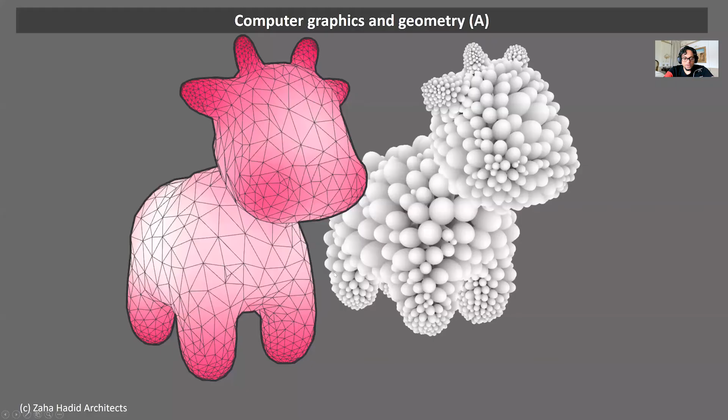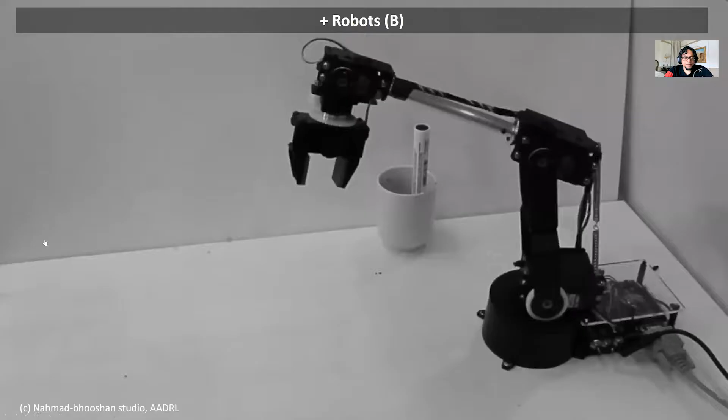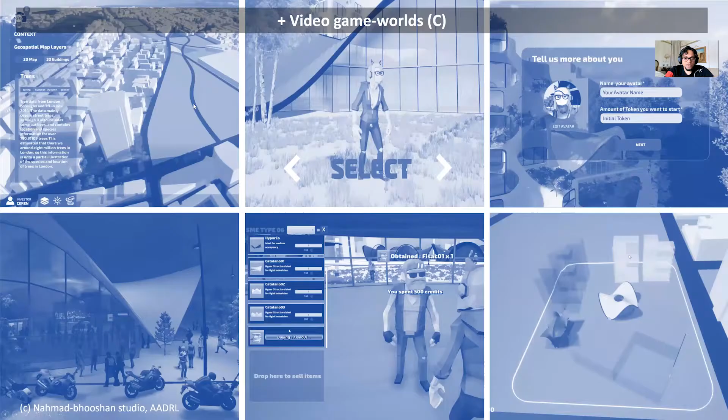The basic idea I want to communicate is that we are combining emerging and rapidly evolving technologies in computer graphics and geometry, along with similar progress being made in robotic fabrication, and also the extraordinary opportunities offered by video game technologies and video game worlds. These three things could be combined as a solution to this.

What do we mean by that? Typically, the built environment, even though it affects all of us, hardly any one of us has a say on when things are built, how they're built, and so on. As a consequence, they end up being unloved and oftentimes leading to demolition, which, as we all know, causes quite a lot of carbon emissions and so on.

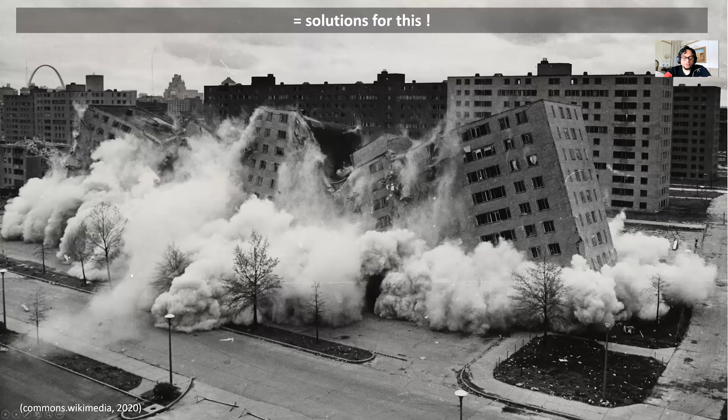The 20th century paradigm or obsession with automation and universality, treating buildings as cars and cities as machines, has led to sprawled cities, very low density development, something amenable to the motor car, and not particularly amenable to humans. On the other hand, it has also made dense, human-scale, pedestrian-friendly cities fall out of favor.

But reality bears other evidence. In reality, Atlanta consumes an order of magnitude more resources and carbon footprint compared to Barcelona for the same population. This is very easy to understand why, because sprawl obviously consumes a lot more resources to heat and to commute, apart from causing a lot of social isolation and mental health issues.

So perhaps it's time to think about not privileging automation and universality, but considering more about material and energy conservation, and adaptability and flexibility of our cities and of our architecture.

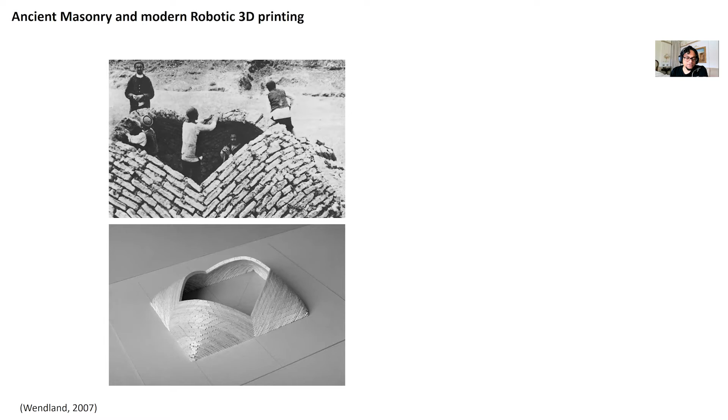One of the things that really interests us is how to capture some of these ancient wisdoms in masonry, particularly not only the global shape, which is particularly suited for very low strength materials like brick and even in many cases adobe, but also how to lay the material in specific directions aligned with the compressive force flow, thereby offering a further paradigm to use low strength and also less material to span space.

This is also very much compatible with the kind of modern 3D printing logic, whether in clay or in cement, because both of these are highly compression-dominant materials, and so a lot of the logic of masonry transfers over to robotic 3D printing as well.

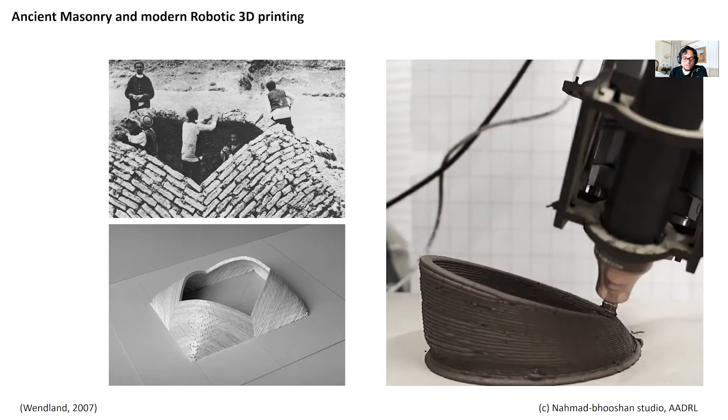Some of these principles were also recently demonstrated at a much larger scale in Venice, where all the blocks follow the masonry logic. There is no reinforcement, it's entirely held in compression. Each block also follows a kind of Nubian vaulting logic, where the filaments of concrete extrusion are aligned perfectly orthogonal to the force flow, the compressive force flow.

Also, you can see that the steel is cleanly separated from the concrete, which allows for easy recycling. So masonry logic is definitely something to consider when we are thinking about 3D printing in concrete and other compression-dominant materials.

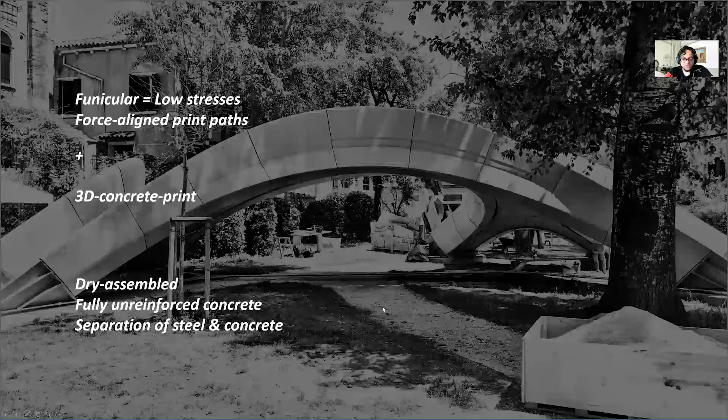I won't belabor these points, but the various features of masonry logic lead to reduction in the overall amount of concrete we use, and 3D printing can allow precise placement of material where it's needed, kind of like an artificial stone which is carved out and mostly hollow. So there's enormous material savings that way. Also, because it's dry assembly, you could disassemble and reuse this, and replace some blocks if they were damaged, so there's a repair regimen that could be implemented.

Also, because of the clean separation of materials, it's very easy to recycle or crush the concrete or recycle the steel separately, which is one of the big problems with reinforced concrete - the steel is deeply embedded within the concrete, and separating them is a bit of an issue.

So that's change one, on how do we design and how to build, trying to incorporate as much of the ancient geometric principles of masonry construction, and also the methods of drawing them.

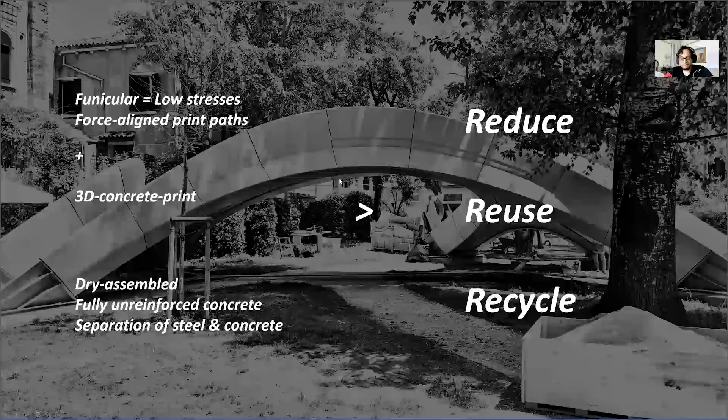What is change two? That is who decides where and how big and how much these buildings should be, and that's where we're increasingly paying a lot of attention to video games.

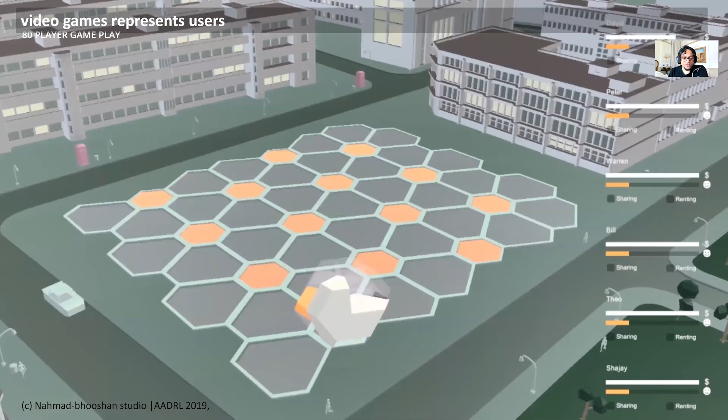Why? Because unlike CAD software and other engineering frameworks, which do not actually represent the end user, games allow us to truly represent in our software systems the end user. So this is a huge change - as soon as you start thinking about the end user, the way you design already changes.

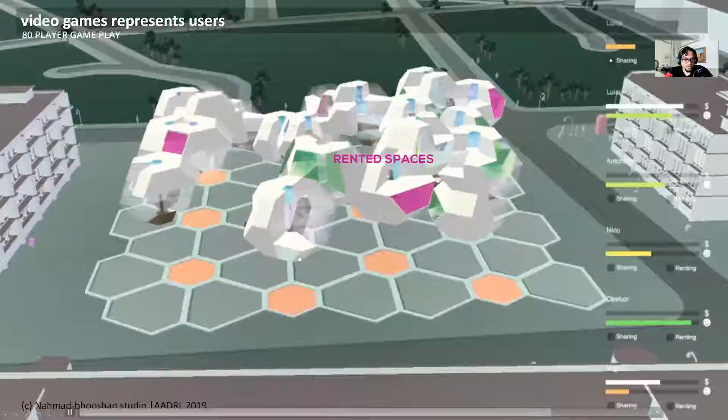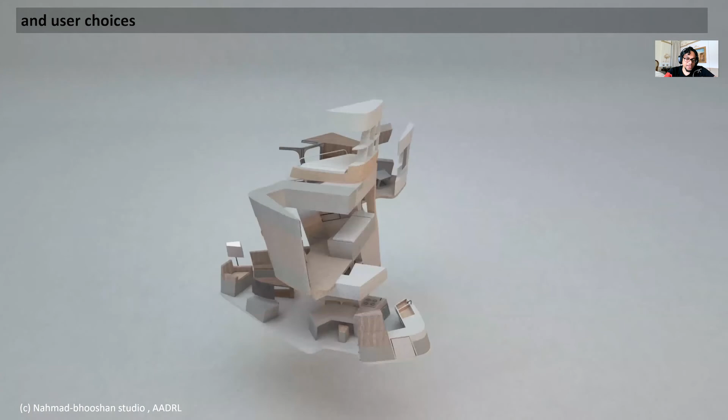In addition, games are built for choice - everything is about actions and a choice menu, which comes default with any game. That's another reason why we're interested in tapping into and incorporating all of our geometric and robotic manufacturing progress into video game engines.

We originally started with Unity, but now we've switched over to Unreal because there's far greater compatibility with our geometry and manufacturing code frameworks. Combining this idea that users are represented and there is lots of choice, there can be a wide variety of alternative outcomes that we need to consider.

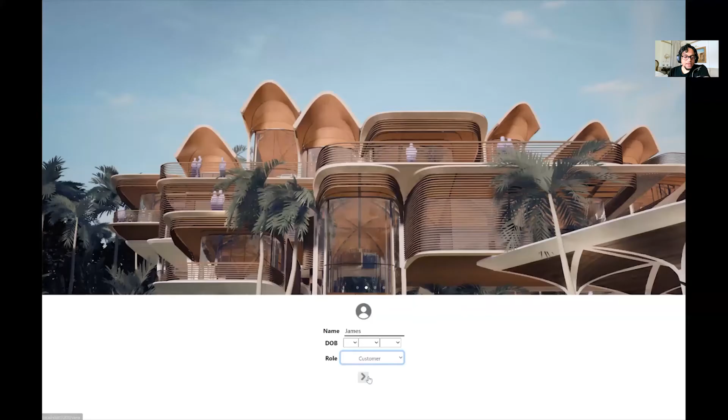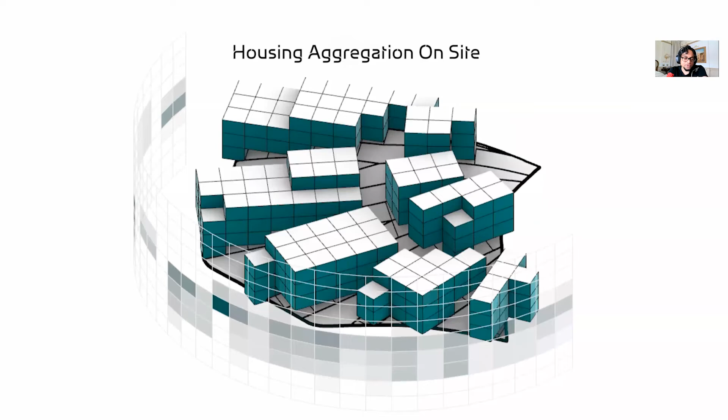We're also prototyping real world applications of this. For example, for a residential development off of an island in Honduras, we developed a web app where users can choose pixels and also rights related to those pixels, like viewing rights and exclusion rights. It becomes an asset that they own, but once you convert it into a user-owned asset, they can also trade it. So that's the general idea of this kind of pixelized version, and it's also video game compatible.

So that's the tech stack: material-conserving and robotically made building parts and building shapes, so-called architectural geometry, which has structural and fabrication awareness. The second big part is end user participation. So together, these really show that one size need not fit all.

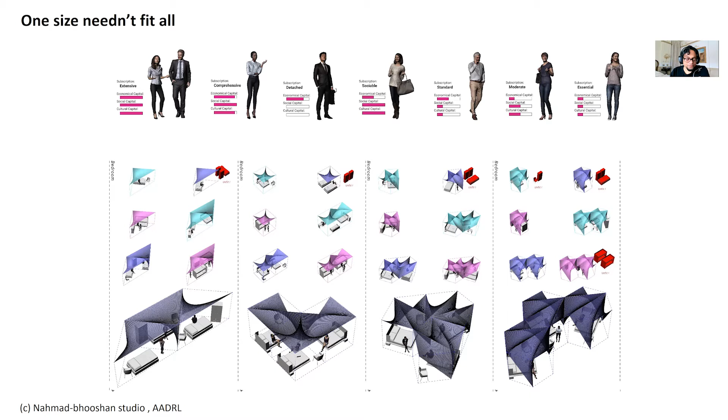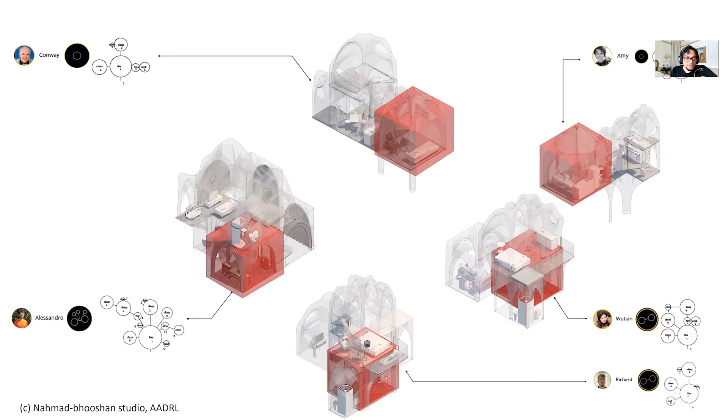You can address the various economic and social and cultural categories or requirements of individual users, and spatial requirements and desires and so on. And what it also means is that if the demographic changes, if the end users change, or the relationships between them change, or the professions and work relations change, or how they use space changes, the parameters could be recomputed, and it could also lead to a completely different language even. So there's not a prescription of a particular style.

There's only a prescription of using these kind of technology and representing users and user choice, and also particularly digital fabrication methods to realize these spatial communities.

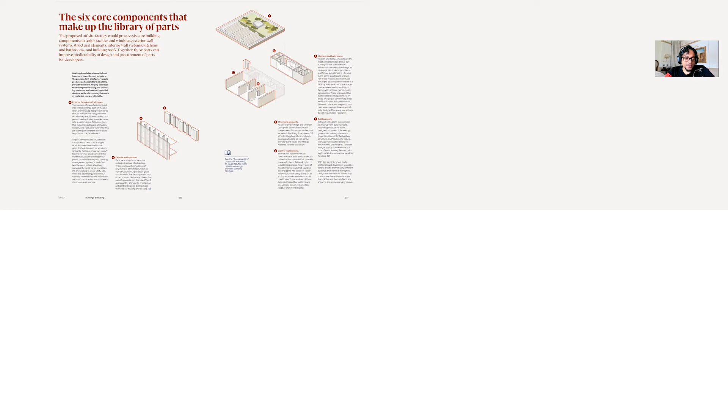So one version of this, obviously lots of tech companies tried this. It's a centralized model, and famous among them is Google, and they tried a version of this in Toronto, where they came up with a kit of parts and also a set of designs that can be composed out of the kit of parts, and also a timber related supply chain.

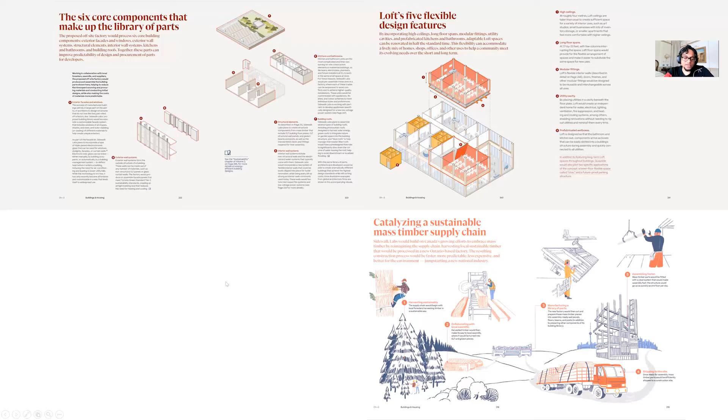To make those parts in a large gigafactory. So there's the A part, which is some form of material conserving shapes or designs, and then there's the digital manufacturing bit. There's a lot of innovation here that Google and Sidewalk Labs did achieve and made progress on several fronts, but there were some issues which are particularly pertinent to the current discussion.

What are those? If we just switch to a different economy or profession, consider centralized games, where a game like Fortnite has millions and millions of people playing every month, and they spend inordinate amounts of time and expenses. They make in-game purchases of assets, so they do spend quite a lot.

It's a big economy, but it is a closed, one-sided economy. Users just buy stuff, and the developers develop features that they think they will sell. The issue with this is you can easily replace, for example, the Fortnite developer with a famous well-known architectural software developer, and you can replace game users with architects, and we know what the issues with that are.

In comparison, we can think of another game like Axie Infinity, where a small change makes a huge difference. What is that small change? It's that the users own the assets. And as soon as the users own the assets through a trustless system like a blockchain, there's individual ownership.

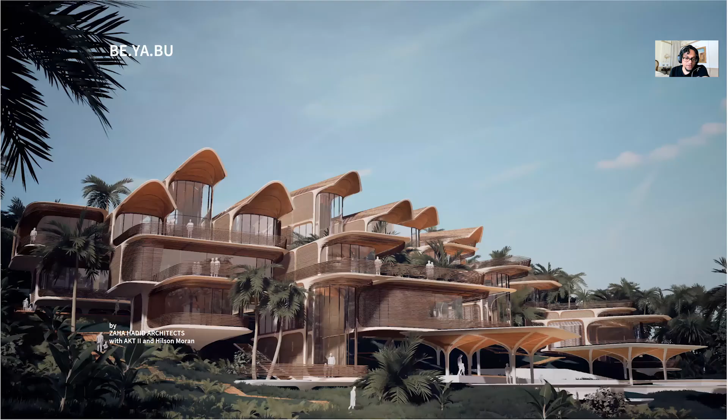We are trying this in Honduras with a little real world test. We started with the idea of two hypothetical companies, one on the early configuration and user participation side, which uses an Unreal game engine, and then the other side to physically realize whatever choices the people make. So this is one potential future that we imagine by playing the game ourselves.

And this is how it works. It actually tends to be a lot more work for the design team, because we have to think of various possibilities between which voxels will be picked and what will be the state of the voxel, etc.

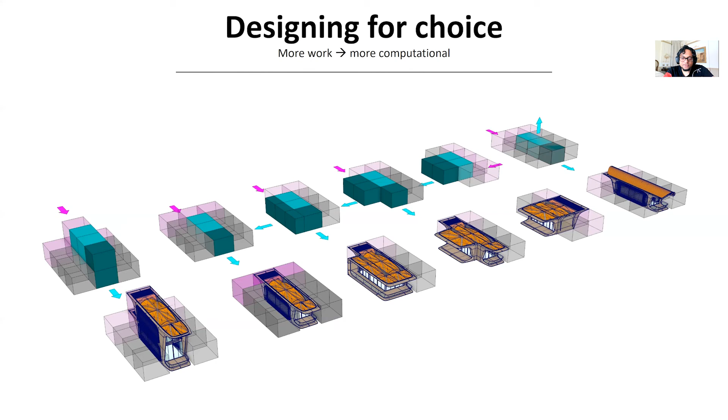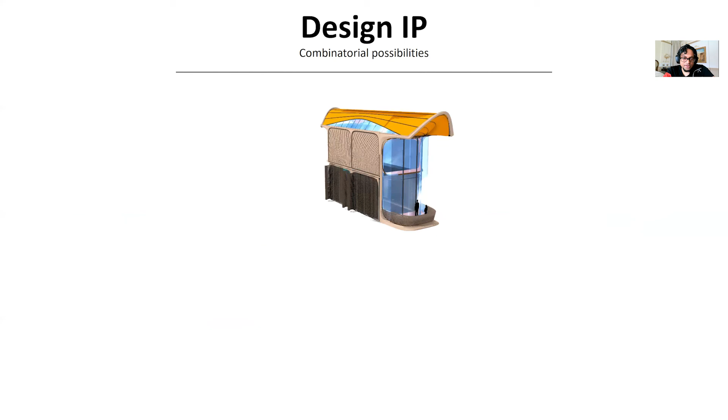We also need to think of a coherent part-to-whole kind of relationship, and keep it varied enough that it doesn't end up looking like one size fits all anyway. So that ends up being a lot more, and a lot different, design work than what we might normally be used to.

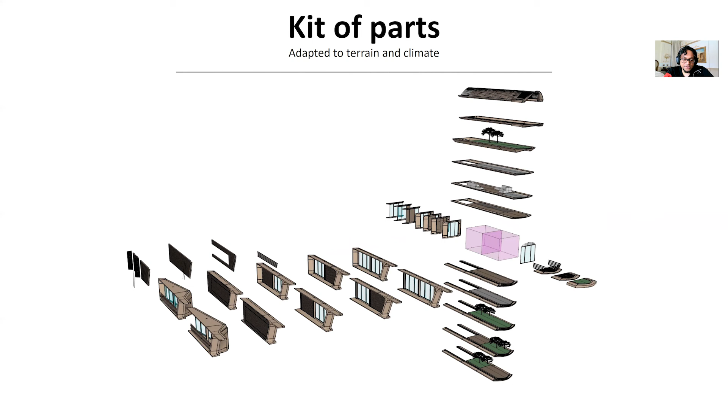There's also more work to be done detailing all the kit, each of the parts and so on. Here's the ideas related to the microfactory: it's low investment, you just import the robots and use local labor, some of whom are highly skilled in carpentry, so you're augmenting the local economy.

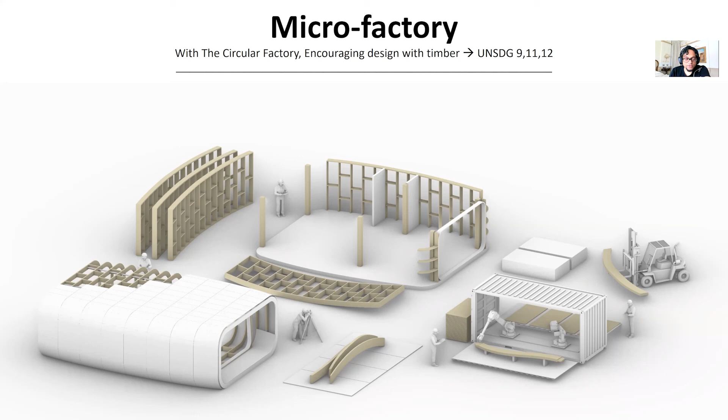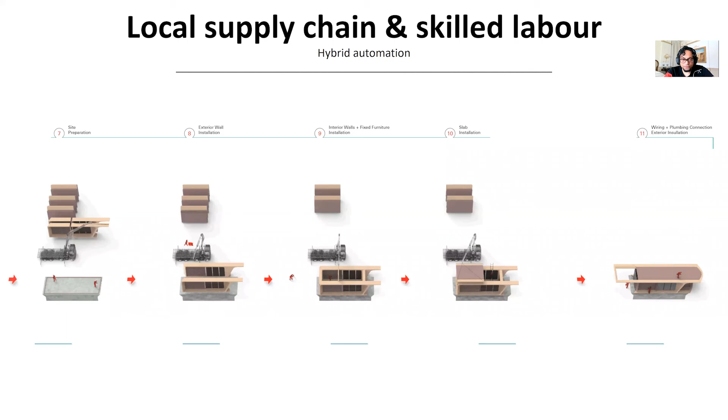Rather than bring in prefabricated boxes, you try and make them on site or near site. That also gives us an in-depth view of how to convert raw material into the final outcome. So this is where we are at in terms of implementing it.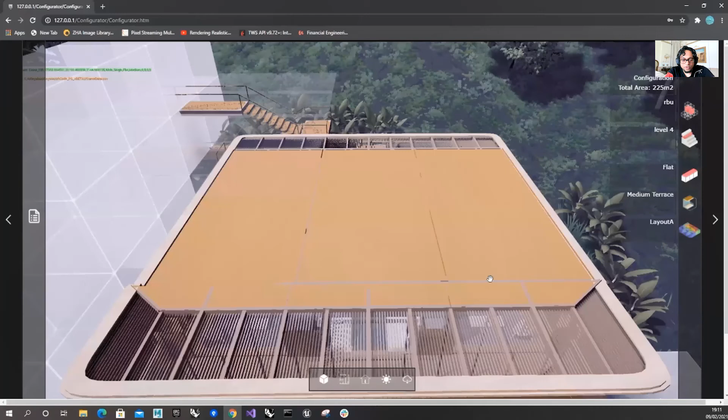Once we put the idea forward, we're building up the framework, and also the intellectual thinking behind how to legally encode all of these voxels, and what people want, etc. So it's just the beginning, but the idea is to decentralize the ownership of these voxels.

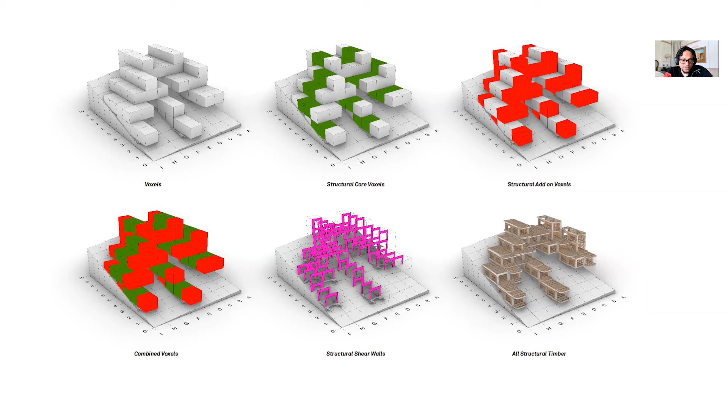One of the other difficulties is that the voxels become related structurally. It's not that they're individually independent voxels that can be tackled independently. There are sub-relations, some structural, some fire compartmentalizing, and so on. There are quite a few fallouts from approaching it this way, like who pays for the electricity and how much, and so on.

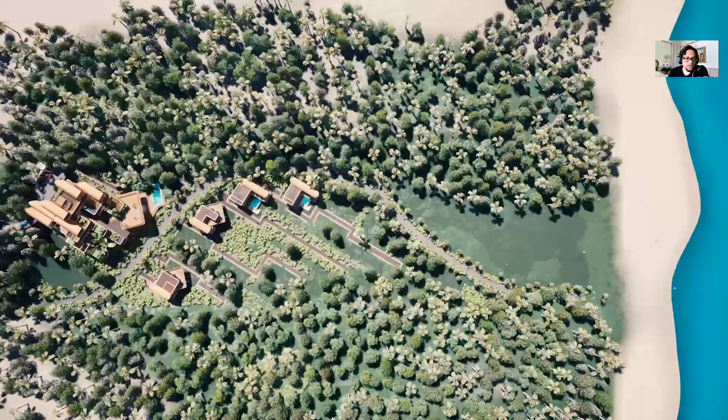It's been a very interesting journey so far, and we believe this could lead to something more substantial than the 11 or 12 houses we're going to build next year. Hopefully we can demonstrate the value of thinking in a participatory way through a real world example.

In doing so, we hope to realize at least some of the manifesto that the Eameses famously set out for their case study houses, like how to understand a vocabulary of materials and techniques, aka geometry and robotic manufacturing and the associated tectonic, and also users and a system of mass production, and so on.